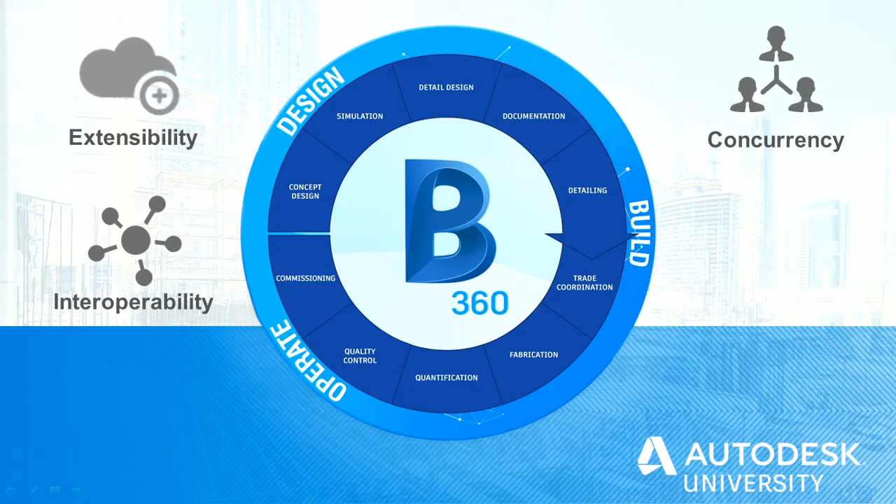Okay, so that's important. Interoperability—this is kind of tied into extensibility. Another challenge we have when leveraging data out of these models is we get into issues with compatibility. We pull data out and try to take it into another software application. Let's use the quantity example again. We pull the quantity information out and try to take it into our cost analysis application. It needs to be able to be read. There needs to be compatibility. So this is another big one.

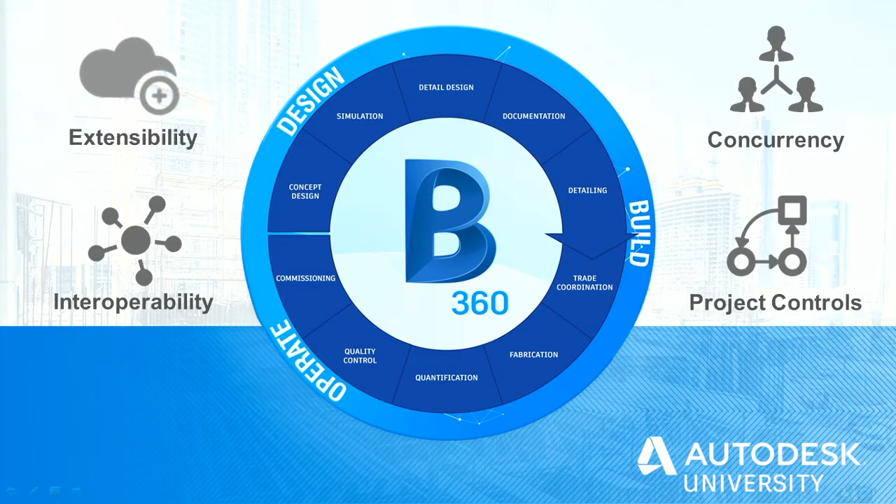And then controls. Now that we have data, we need to put that under a lens or in a dashboard or some sort of application that allows us to use it for controls on the project, be it a design project, a manufacturing project, or an execution—a construction execution of design data of a project, or the manufacturing of something. We need to make that accessible and put it through an instrumentation that allows you to manipulate it. Is everybody with me so far? Yeah? All right.

Okay, all right. So the example I'm going to show you up here to kick this off—you guys all understand this is a round table. At some point, I only got a couple slides left. We're going to start talking, and we're going to start answering questions and getting interaction, so I want you to be prepared, so it's not abrupt after a couple of slides.

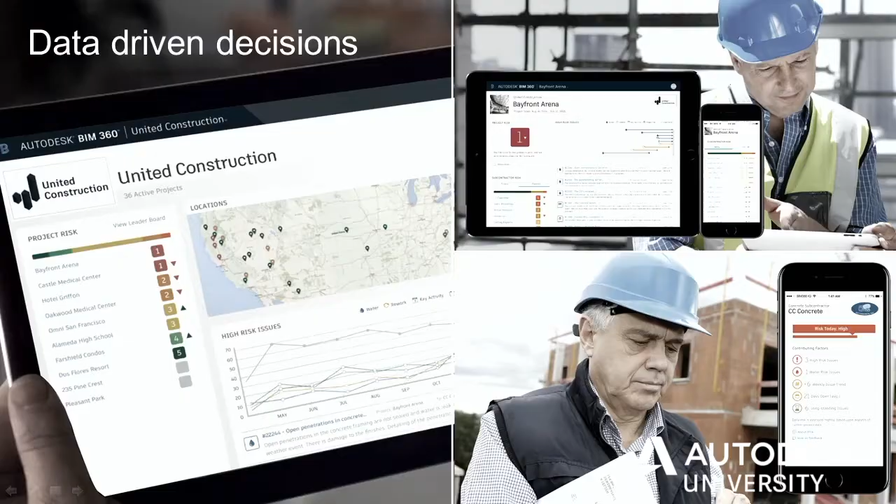All right, so Project Insight, in the construction space, in BIM 360, is using this data, and it's our machine learning and artificial intelligence application upon this data to start making better decisions on your project. And those decisions aren't just based on one particular project—what we've done, and this is what Tom talked about this morning, we've started to gather data from all projects that have been done in BIM 360, and issues that have come up inside BIM 360 on those projects. We've accumulated a database of about 20 million so far.

So this is going to keep growing, right? And this is where machine learning comes into this, because now, if you're using this, you're not limited to your company's information historically, or that project's information, but the machine learning starts to analyze those 20 million issues and can start to come up with a way for you to predict what's going to happen on that job.

The example we're talking about here in construction, that's one of the biggest risks in construction, is not being able to predict things that happen. It costs a lot of money with rework when mistakes are made. The ability to predict or forecast where an issue might happen before it happens is really powerful. But this is only made available through machine learning, through artificial intelligence, because now the machine can analyze these 20 million issues and can quickly come up with trends, patterns, and other things to inform you as you're working on the project.

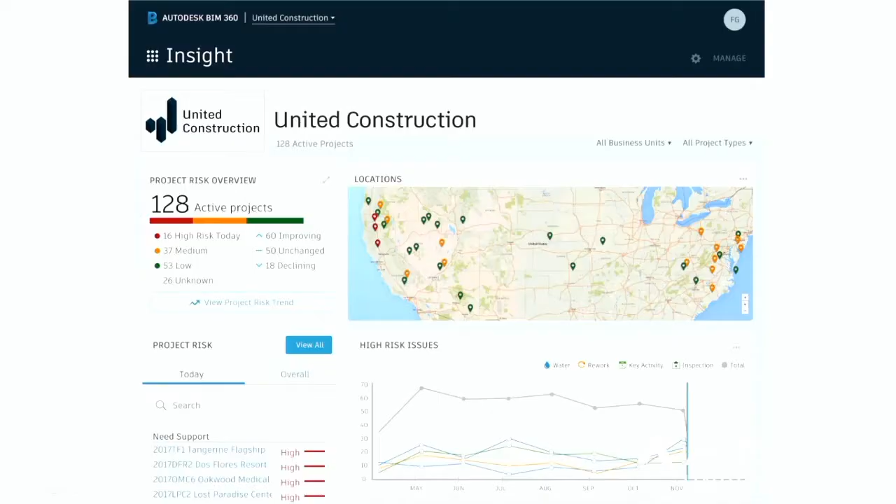Okay, so let's walk through this a little bit. It's called Project Insight, and it's going to walk you through what's going on here. So you see there's a series of projects, and it starts to look at where the issues are, where the risks could come up. And then it's going to hone in on one project. You can see, I know it goes kind of quick, but it starts to look at areas—concrete, waterproofing, other areas—and it's extensible. It's available on a mobile device, a tablet, it's mobile, so everybody has it, they have the most current data, they're working from that. So this one's all about risk.

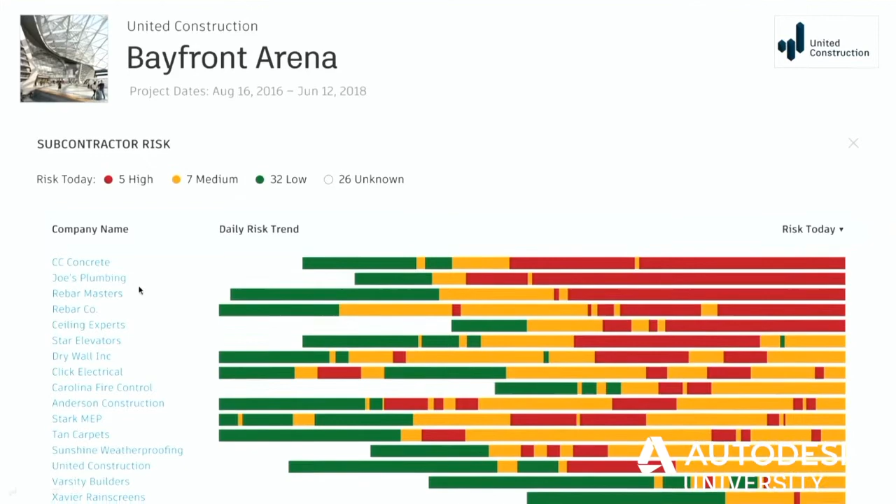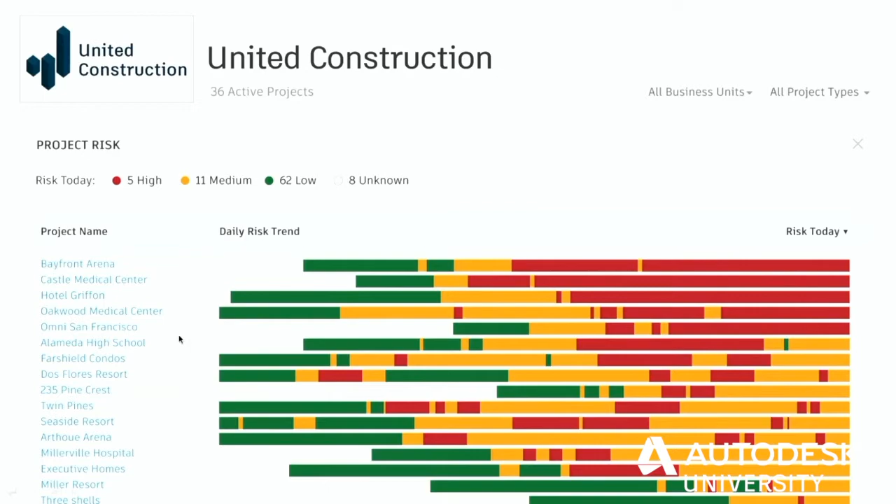And then when we look in here, we can start to see the things down the left side. What's really cool here is that it starts to analyze all these different projects from that one contractor, but also pull from that machine learning that it did on all the issues that have been put into the system. And then you get this dashboard, this lens, that can help you make better decisions so you can start to look at and consume where these issues are. You can see at the top where it's looking at high, medium, low issues. It's got all the projects listed here, so you have multiple lenses you can look at. But this becomes really valuable.

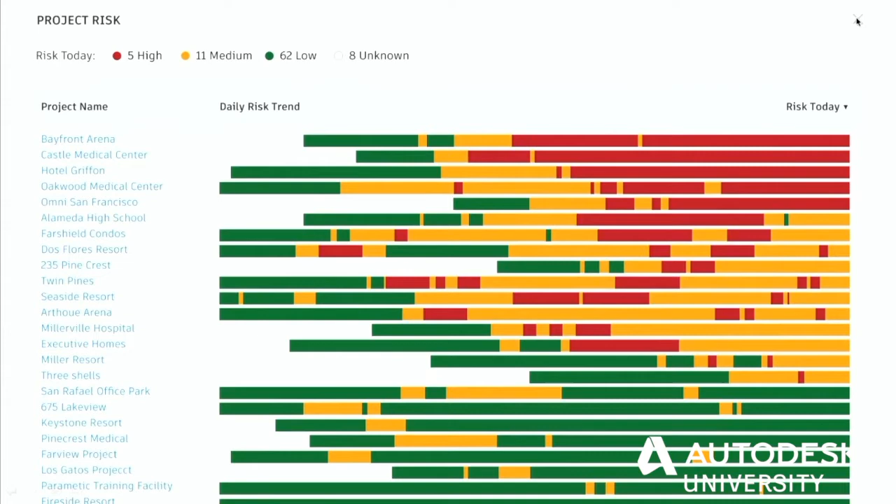This particular one was 5 IQ models that were nested in this one view. So you can create customized views—that idea of project controls I talked about—of taking that machine learning data, that intelligence, but putting a different lens on it. So this is one lens in construction that we can look at that data through.

All right? Translation's okay? Yeah? Okay.

So here's a quote from Layton Construction. This tool is what they are building their future processes on around risk management. That's how valuable this is to them. They've bought into it. It's been in beta, but even in beta, it's got 20 million issues built into it already. But these guys are saying, you know what, this is the future of this, because I can be much more predictable and control risk, cost, and different issues on the project by using this technology.

All right, you're forewarned, we got one more slide, then we got to make it interactive.

Okay, so at the end of the day, for those of you from the AEC industry, BIM was our first step into having intelligence. We put intelligence onto a graphical model. We then took that intelligence in BIM and started to extract it outside of the model for different design tasks, bringing in different software. We've now extended that, at least on the AEC side for Autodesk, into construction, where we're starting to use machine learning. Now we're starting to take that data and build a knowledge base around it that can be manipulated by customers. So real powerful stuff.

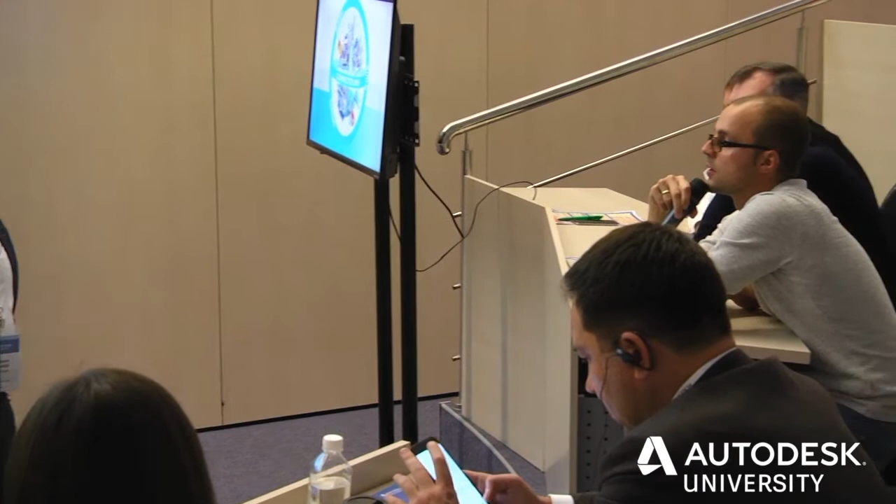You can. I have a question about the general idea - how does Autodesk check the ground or pick up the direction to develop its software? AI and big data is a very vast domain, so how do you pick the niche, and how do you analyze what will be lucrative and where to go, if that makes sense? How do you analyze what will be flourishing and how it can work? You mean where do we put our efforts to develop software? Like where? Okay, that's a good question. So the question is where do we focus as a company, Autodesk, on where we invest. No, where? How do you pick the right niche? Not where, but how - how do you think?

It's about how do you make the choice that you will develop big data or AI - what will be the next trend, how do you decide? Oh okay, I got you. So the question is, how do we make decisions on where we invest, where we put our efforts? Is that right, is that fair?

Like any company - and I don't know that this ties as much to us leveraging big data to do this - we make our decisions based on trends happening in adjacent markets. We do analysis and optimization on that analysis to figure out where we should invest. What's happening in the construction industry is highly influenced by manufacturing. Manufacturing is a constrained system, usually an assembly line, so things tend to get more automated and happen faster. But those of you in the AEC space see that a lot of the learnings from there over the last 20 years with technology are starting to be applied to the construction and design industry - prefabrication, for example, building things in a factory versus bringing them on site for tolerances and accuracy.